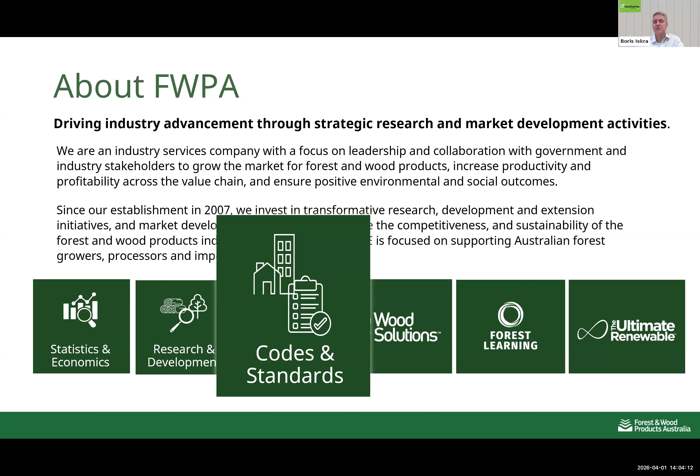The program area that I look after is the Codes and Standards program, which is where the development of the timber cladding standard was undertaken. If you're interested in the work that FWPA does in terms of codes and standards, go to the fwpa.com.au website and look up standards. You can also subscribe to updates and get information about the work we're undertaking.

Some of the recent work we've done is the release of a number of visual grading standards for recycled timber, covering both structural uses and appearance grade. The key one today is the exterior timber wall cladding standard. We're also developing standards in relation to test methods for timber connectors in the structural area. But as I've said, today we want to talk to you about the use of timber cladding in particular.

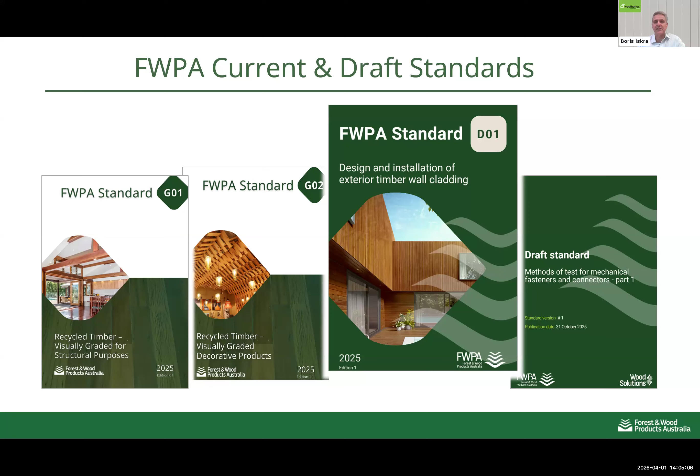So why was the standard developed? It's really to try to build confidence in the use of timber products, and also to help simplify compliance. The standard itself takes a risk-based approach, and I'll run you through briefly what that means, so we can identify the potential hazards in relation to weatherproofing and water penetration into our cladding systems, if that occurs, but also trying to extend the use of timber cladding beyond our domestic houses.

You may or may not be aware that timber cladding has been available for use on domestic housing under Volume 2 of the National Construction Code. With this standard, we've extended that for use in commercial type buildings, or low-rise commercial buildings, and also providing best practice.

G'day, Jason. We've started the webinar. No, keep going, Boris. Sorry about that, everyone. Okay, yeah, okay, no worries at all.

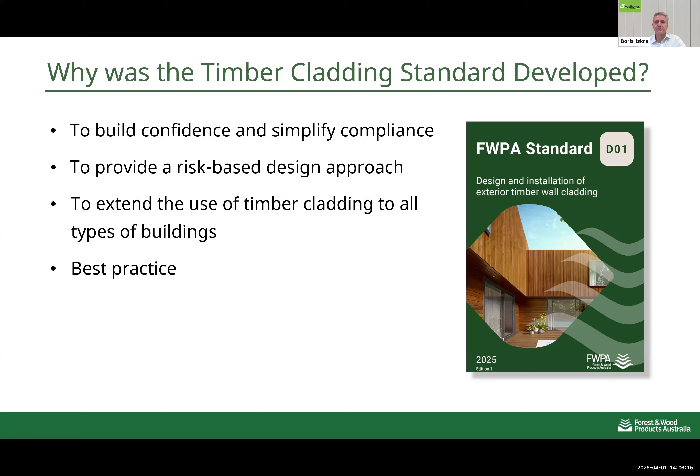So as I was saying, just to provide a bit of best practice for the installation of timber cladding. The standard covers a range of things, looking at materials and enabling you to select systems, addressing both moisture ingress and condensation management, providing ability for fixing design covering different wind speeds around Australia, and as I mentioned, the risk-based approach. It provides installation and detailing, discusses durability, and overall looks at the resilience, enabling you to design for a site-specific building.

Boris, as well. Yes, picking up with some of the questions. There's a question from Niall Scott. So this is referring to Type C construction only, then for external facades, presumably, is the question?

Look, when you say Type C, we've got Type C construction, so it will basically cover off Type C in the commercial space as well. So in effect, wherever you can use that Type C construction on buildings, you can utilise the cladding standard. So no, that's correct, yeah.

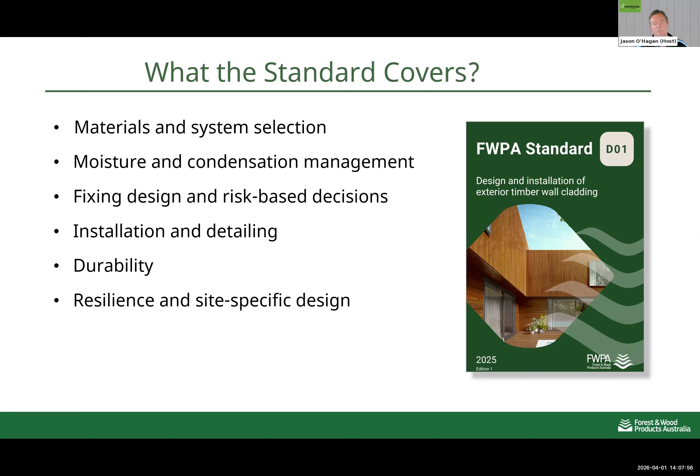Thank you. So look, just talking about the National Construction Code, and we're probably aware that there's a new code, a 2025 edition, that's about to be called up in a range of states around Australia. But what I thought I'd do now is just talk about where we've come from, or where we are currently, under NCC 2022, and then where we're meant to be heading under 2025.

But just as the overarching comment, the main requirements that you need to comply with are the performance requirements of the National Construction Code, or the Building Code of Australia, as we often refer to it. The legal requirements are the performance requirements. And the way to meet those performance requirements, there are two pathways. On the left-hand side, the red dashed rectangle showing the performance solution, and on the right-hand side is the deemed-to-satisfy solution. So there are two basic pathways for compliance purposes.

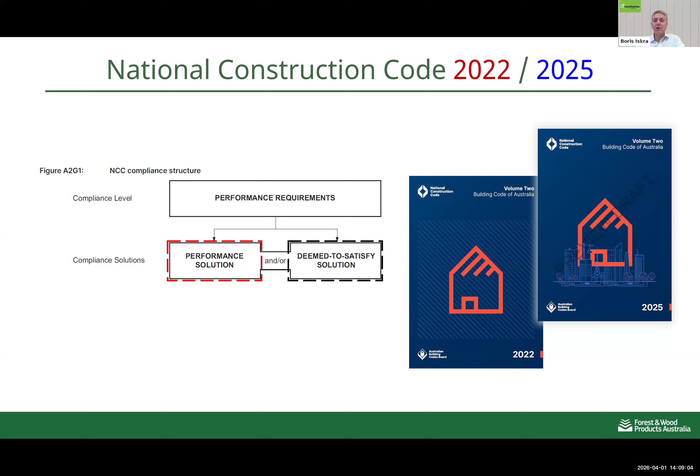So what I want to do is briefly talk about both of those as I go through the next few slides. First, I'll focus on the deemed-to-satisfy, which is where we've got potential changes occurring. Currently under the NCC 2022, where you're installing a pliable building membrane, you need to comply with relevant standards for the membrane itself, as well as the installation of that membrane. And then the NCC stipulates the type of membrane in terms of its permeability or permeance that it needs to achieve. So it nominates climate zones 4 and 5 with particular permeance, and then also for climate zone 6.

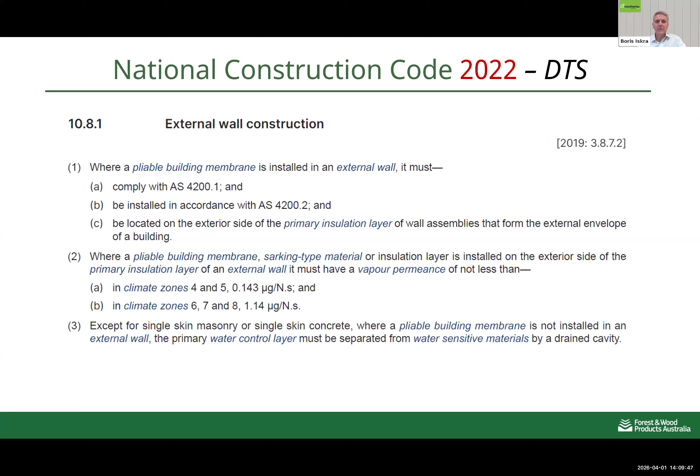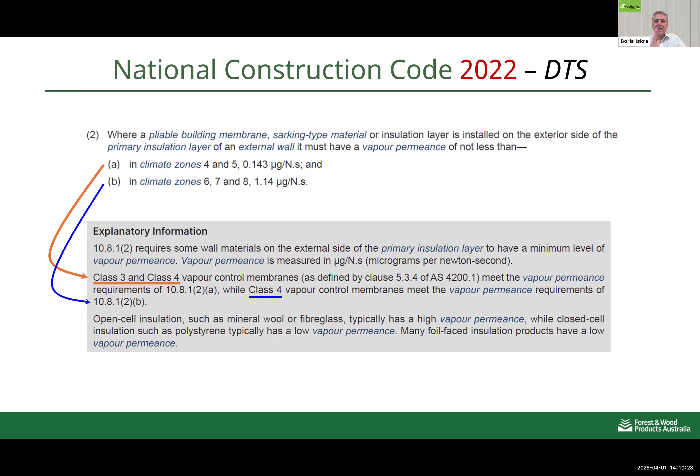So if we look at that, there was commentary or explanatory information under that particular clause that nominated the type of membrane required based on class of membrane, which is the way that they get referred to or defined. So it defines the membranes that can be used. And for climate zone 6, you could use a class 4 membrane, which is still today's. But you could then, in effect, do what you want to do with your cladding, as long as you use those membranes between the cladding and the structure, sandwiched in between your cladding.

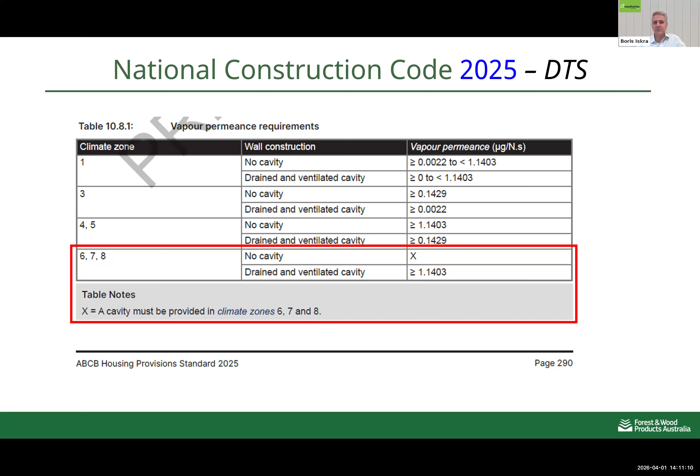What the NCC 2025 has done is actually made a modification to that, where now it's going to stipulate that for climate zone 6, 7, and 8, there are areas where it's got a no-cavity option with a cross, which basically means you must have a cavity. So the no-cavity solution is not there for those climate zones under the deemed-to-satisfy, and so you're requiring a drained and ventilated cavity, still with that class 4 membrane in climate zones 6, 7, and 8. Obviously, the other climate zones have different permeance requirements, depending on if you've got a cavity or not. So that's under the deemed-to-satisfy pathway.

One of the reasons for developing the industry standard was to enable us to do this from a risk-based pathway. At the moment, the standard is an industry standard, but it can be used under the performance solution pathway under both the NCC 2022 and the NCC 2025. So in effect, there's a procedure that you follow when doing a performance solution, basically engaging with your building surveyor and other stakeholders. If you're doing a house, it's going to be your client as part of those discussions, and just getting endorsement by the building surveyor certifier that you're able to utilise the standard. So it's just via agreement. And I'll go through how the standard developed to give you the confidence that you can do that. It does utilise...

Boris, sorry. Sorry, yes, yeah, to clarify, just one question. Sorry, an email. Can you remind everyone what parts of Australia are Zone 6, 7 and 8?

Look, basically climate - because I'm based in Victoria, my mind tends to focus here. So basically the main capital cities are down south. You get a climate zone 6, such as Melbourne. Climate zone 7 gets out to the regional areas, and climate zone 8 is the alpine or mountainous areas. The climate zones obviously change as you go up north. So you move into the warmer climates - in Sydney we'll have climate zone 5. And then as you go up into Queensland, it's got 5, I want to say 6 in there. And then as you go inland, it's 4. I'm just trying to remember off the climate zone map.

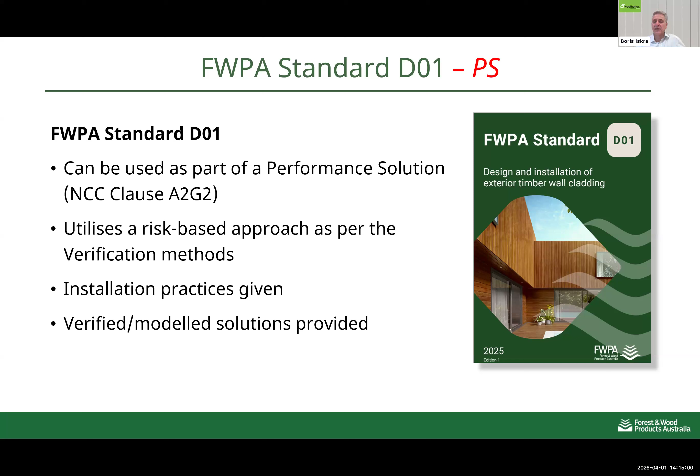But in terms of the standard itself, some of the systems in there have been modelled - so they're modelled solutions that take into account thermal movement as well as condensation through the building elements. It's all been done in accordance with the modelled and verified approach. In our standard we've got this risk factor table, which is basically a copy out of the NCC. The NCC has this table if you're doing a design using what they term a verification method. A verification method is a procedure that if you follow it, you can comply with the NCC by demonstrating performance in accordance with the verification method.

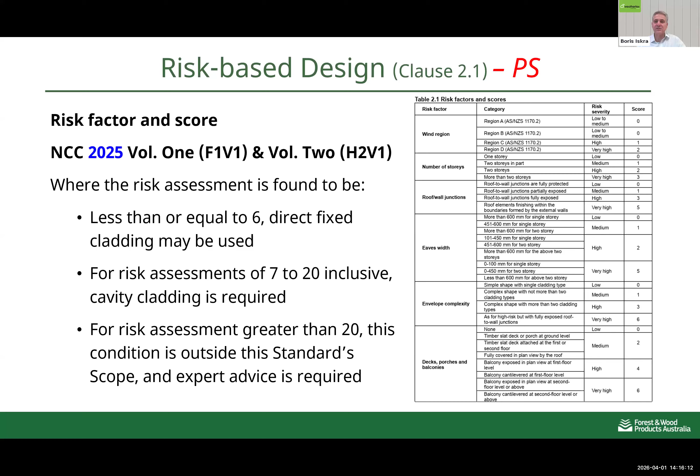Both Volume 1 for commercial buildings and Volume 2 for housing have a verification method, and it's a risk-based approach. As you see in the table, it depends on the wind area or wind region you're in, the number of storeys of your building, how exposed the junctions between the walls and the roof are, and how wide your eaves are to provide protection from potential entry points. Windows are one of the key areas where we want to provide adequate flashing, and having eaves protection is a good means of providing that. So this is all in the standard - you don't need to remember this, but it's all available in our design standard.

We also have details as to how you can design the battens where you're putting in a cavity. So we've got spacer battens, which are basically battens that run along your timber stud, just providing a cavity so you can get drainage in behind your cladding, or structural battens, where they run horizontally and you fix your cladding to the structural batten that takes the wind force or wind load. The spacer batten has got no structural performance, so you basically screw through your cladding, through the spacer batten, into your stud.

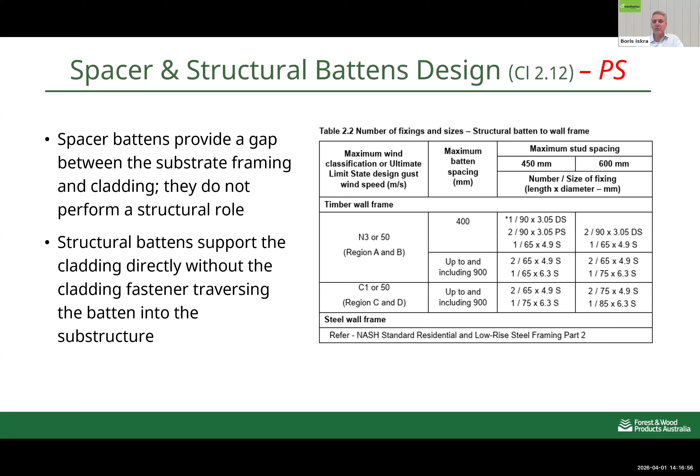So there's a key difference between those two types of battens. Here we've got a table that provides battens, batten sizes, which also cover off on castellated battens as well. We've engineered and designed those, and they are detailed in that table, depending on batten spacings as well as stud spacings. It's all been engineered designed to comply with the wind forces on the external envelope of your building.

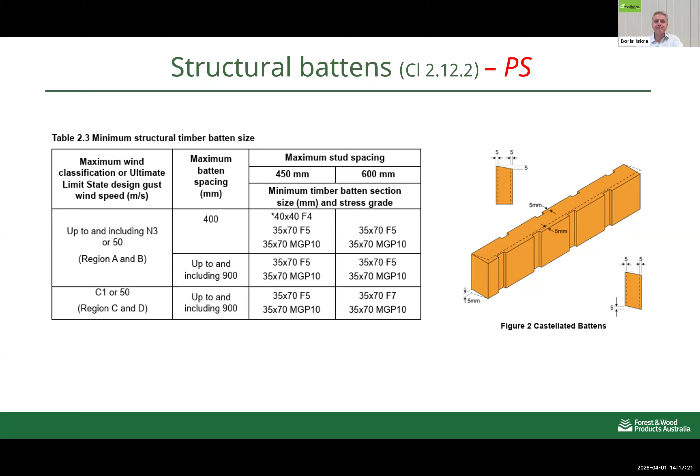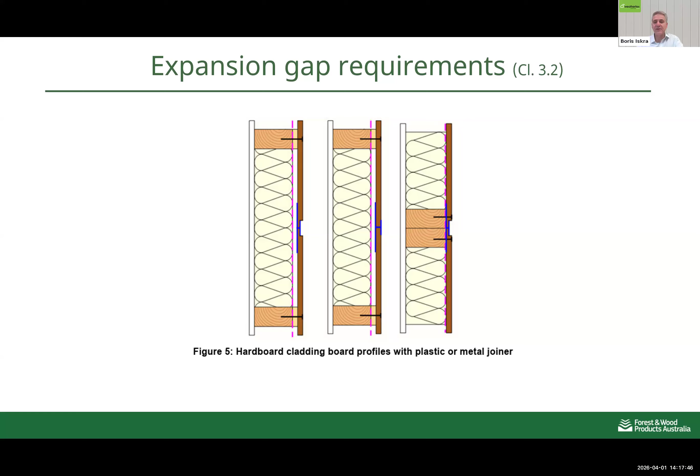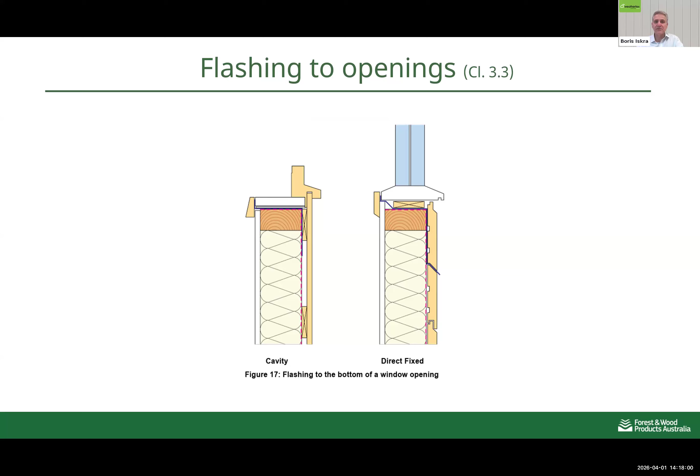Then the standard provides a whole range of details, and I'll just quickly skip through this. We talk about how you can join various cladding elements. In this case, we're covering the hardboard, showing details where you're doing joints between the studs or on the stud work in the far left-hand diagram. Also shown are flashing details around openings, which is a key area where you don't want to get water past that window. So we've got specific flashing details for those openings, and also showing you fixing and how you can fix various types of cladding profiles.

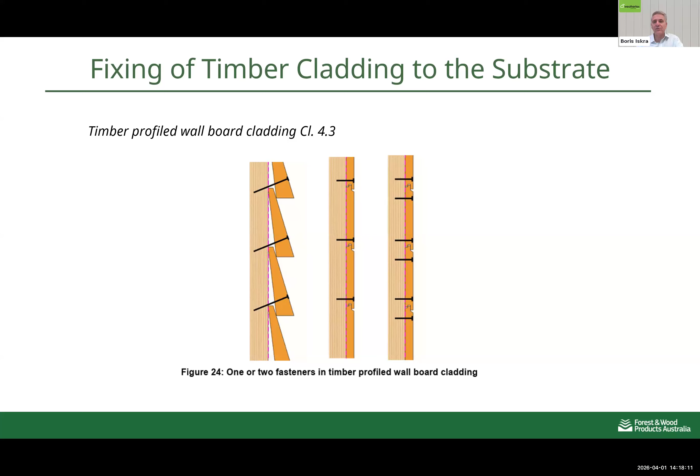Here we're showing what we call wall boards, or the weather boards or profile boards, but we also cover off on hardboard products. So we show different types of cladding - overlapping with or without a spline, rebated cladding boards, types of fasteners, also the wind speeds where they can be used, and the general stud spacings and the fixings based on where it's located on the stud.

So studs that are in general areas - getting into the wind requirements - but anything that's within 1,200 millimeters of an edge of a building has higher wind forces than when you're within the center of the building. So there are different nailing configurations you can use, or for the requirement within 1,200mm you can apply it across the whole building or whole wall, and you'll automatically comply. So you get higher wind forces near the edges of the building.

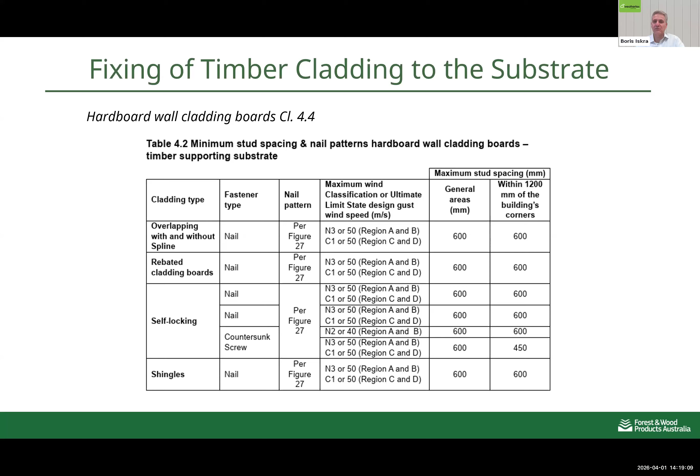But then we'll also show typical fixing requirements, whether or not you're fixing to a stud or fixing off stud, as in that central diagram. And then we show basic layouts and the installation of the vapor permeable membranes as well.

Boris, one other question from Gina. We now have wind ratings to N6 in Queensland. Where does that fit in?

In N6... well, our timber framing standards don't go to N6. I'd have to have a look at that. Sorry, it was Gina, okay? Yeah, no, we've got the details there, Gina, we'll come back to you. After this, I suppose - in relation to what we've got, we don't cover up to N6. I'm really surprised about that, because even our residential timber framing standard goes to N4 and C3. But for the cladding, the wind forces are basically trying to rip the cladding off, so we've limited ours to N3 and C1 for our cladding standard. So look, my first response would be, if you're in an extreme wind area, you'd have to talk to a structural engineer to ensure the fixings are adequate to hold the cladding in place. But under our standard, we haven't taken that step. I'll have to go back and double check on that. We'll get your details, Gina, and try to come back with more after this. Yeah, thanks, Boris, but as I was saying, basically our cladding standard doesn't go to N6.

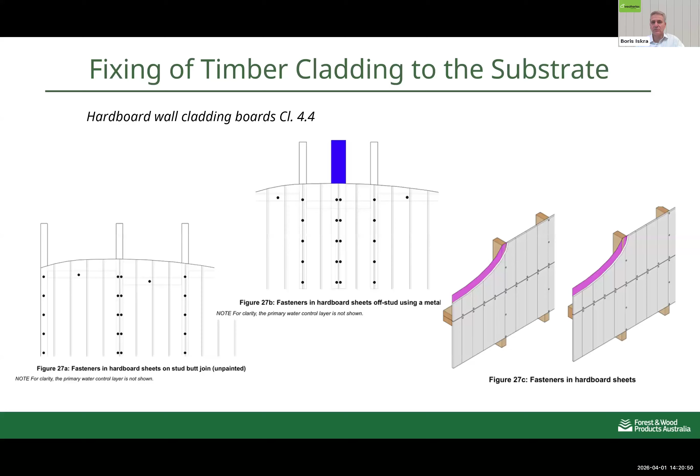So in the standard, what we have done is have a range of different systems that have been modelled, both for energy and moisture movement through the wall. These are the ones modelled using WUFI software, and these are the systems deemed suitable for use in various climate zones. I apologize, we don't have all of the climate zones covered, and I need to go back and look at why we didn't do some additional ones. I think one of the reasons was there was concern, when this modelling was done, that there may not have been big demand for these types of systems in some of the other climate zones, which I think has probably changed in recent years.

Anyway, so we've got climate zones 2, 5, 6, and 7. Climate zones 1 and 8 aren't covered in the standard, so if you're in those areas, you do need to get advice from someone who can do the modelling work to ensure we don't get condensation occurring on the frame side.

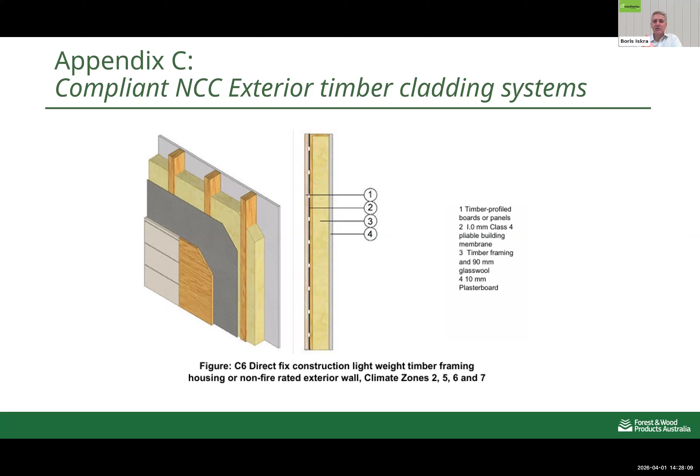So this is where there's a conflict between NCC provisions and what we've modelled for this particular system. I think that shows there can be differences for some reasons.

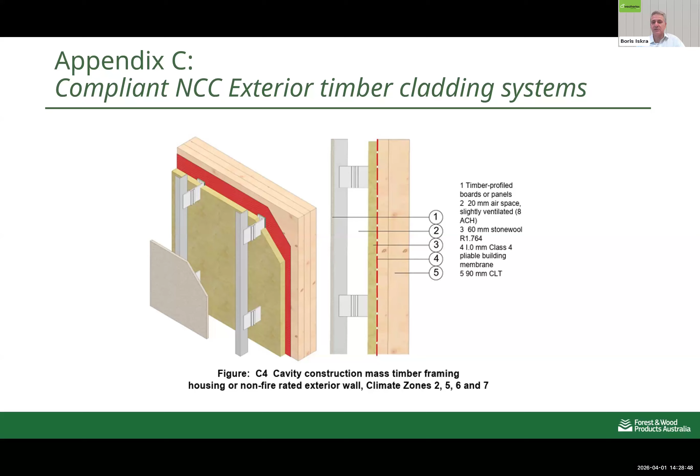One other question before you summarise - has FWPA had a certified test process a performance solution through NCC using this standard?

When you say process, as we said earlier, it's a site by site or building by building scenario. So it's not really for FWPA to put that forward as a performance solution. It's the person wanting to use timber cladding engaging with the building certifier for use of this standard.

In my mind, it should be a no-brainer. We've taken this standard through the formal process of the Australian Building Codes Board for development of referenced documents for the National Construction Code. We've adhered to their protocol, and at the end of that process we've now developed this standard. So in my mind, we've got a document waiting there for calling up in the NCC.

There's no further work we need to do on our document if we don't wish to. If we do further work, we'd have to go through that process again, going out for public comment and reviewing, which is part of the process.

But at the moment, all I'd say is, if you've got a building or a house, it could be a single-storey school building that you want to put timber cladding on, talk to the certifier and say I want you to use this standard - who else do we need to engage with in developing the performance solution? Because it's meant to be done in cooperation with all stakeholders in relation to that building.

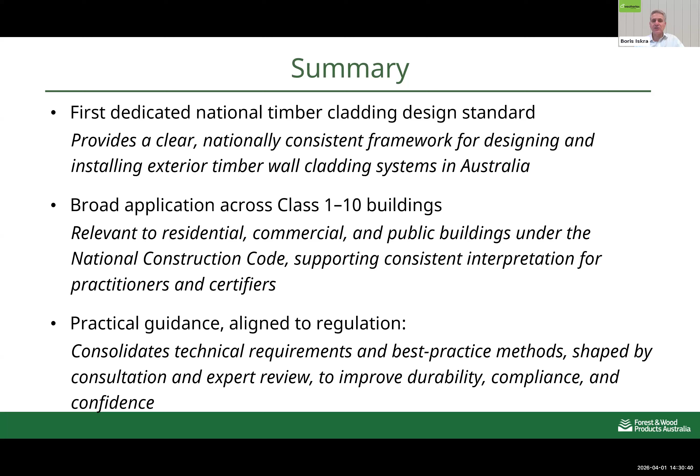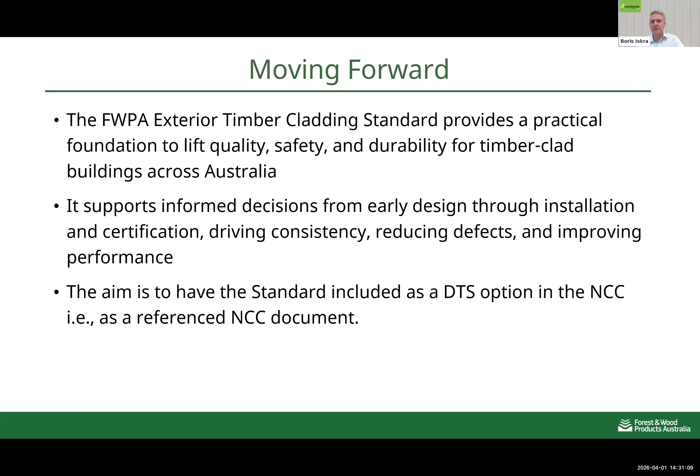I know we're at the end - I've left that summary up just to give an indication of the work we've done, showing additional solutions like the CLT one. But basically, the last dot point's the key one: we've gone through the NCC development of a referenced document process, and the aim is to get this called up in NCC 2028, or NCC 29, whatever the year becomes. I think it's NCC 2029 when the next revision of the NCC is meant to happen. So I'll leave it there, Jason.